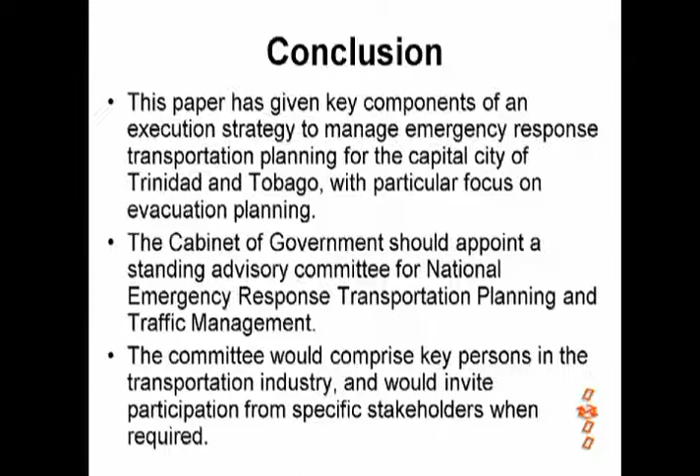The next presenter, for those of us who would have been in the University of the West Indies during the period 1977 to 2005, he would be... excuse me. Yeah, he is certainly no stranger to us.

Engineer Dr. Robin Osborne was born in Dominica. He worked at CARIRI from 1972 to 1979 at the Faculty of Engineering, the University of the West Indies from 1977 to 2005. Sorry, let me start again. From 2008 to 2011, he was an associate professor and vice dean at the Faculty of the Built Environment, UTech, Jamaica, and he now resides in Florida of the United States.

Experienced in both undergraduate and postgraduate university teaching and research, he has been involved in the supervision of 2 successful PhDs at UWI in St. Augustine, one in civil engineering and the other in chemistry. The latter was awarded with high commendation. His major specialization is concrete technology and construction, but he has also worked throughout the Commonwealth Caribbean as a consultant to Caribbean governments and companies on aggregates, standardization, and post-disaster recovery. He has also worked as an instructor in concrete technology and the maintenance of buildings.

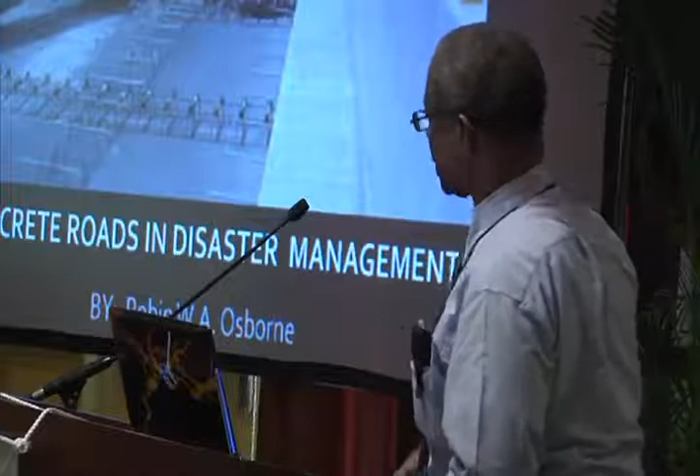Good afternoon, fellow engineers and all necessary dignitaries. Robin Osborne. I'm going to speak a little bit on the subject here, and I'll be as quick as possible getting through the preliminaries because I want to get to my main point of interest. The subject is concrete roads in disaster management, and I want you to half memorize that picture. It is a no-slump concrete being laid. If you look carefully, you will see dowels already placed for joint control, which will be shown later. And some of these pieces of equipment can spread both asphalt and concrete. I'm going to find that the comparison is inescapable.

Let me make sure I have this. Sorry. Which is my, that's, okay, good. Okay, good, thank you. Oh, I can use this one too, that works, good. Sorry, never used this one before.

I would like to acknowledge the support of the marketing department of TCL, Cecil Chin, engineer, for some of his very useful contributions and counsel, Larissa Smith of Carib Cement, General Manager's Office, Arawak Cement.

We cannot escape discussion and comparison between the 2 main forms of pavement systems. And when I look at the literature available, I've looked at American literature and some British literature, the battles that continue to go on are fierce. Engineers are often involved on both sides. There is hype and distortion. And one of the things that is unfortunate is that depending on who pays your salary, you sing a tune to suit. I'm going to try to walk a higher road than that. The issue is complex, and there is need for objectivity and relevance to the Caribbean in any comparisons which we do.

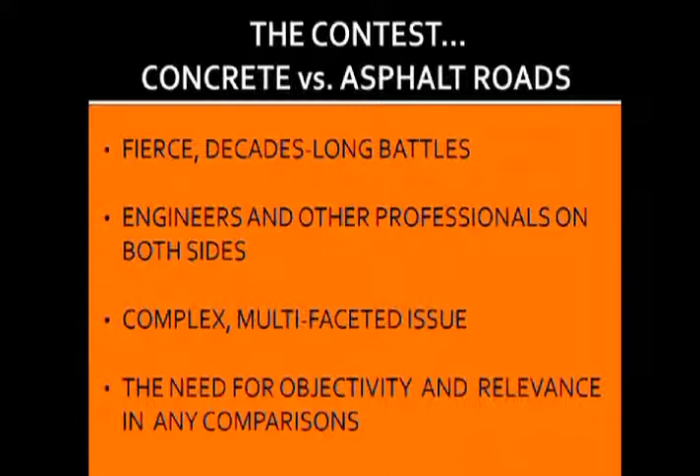It's a very narrow subject. The literature I looked at was not very helpful because it tended to compare asphalt and concrete systems under normal traffic. We are in a disaster context, and so I've tried to keep my focus on that. So in broad structure, I'll be doing some comparisons between the two systems. And my key thing is to look at some projects in the Caribbean, and then a few comments on pitfalls to be avoided, etc.

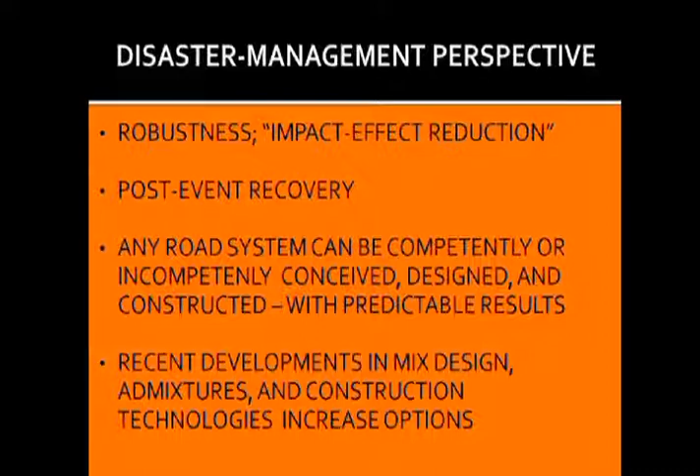My thrust is prevention. That is, if a similar impact can hit two critical systems, and one of them is likely to be operable and usable and serviceable after, then that obviously is a critical consideration in disaster planning and management. Of course, there are issues of cost and so on. So that key thing, what kind of effect can it sustain and remain operable? How does it contribute to post-event recovery? Let me be very honest and say that any system can be competently or incompetently designed, regardless of whether it is made out of concrete or made out of asphalt.

And we need to take note of recent developments in this area in concrete, because they give us considerable flexibility in terms of what we can achieve. In addition to pavements, I quickly want to add these things. I will not spend time, ladies and gentlemen, fellow engineers and friends. These are all well known in our business. And concrete road systems is what I'd like us to think about. We also include all of these appurtenances, some of which can be slip-formed as the road is being made, okay?

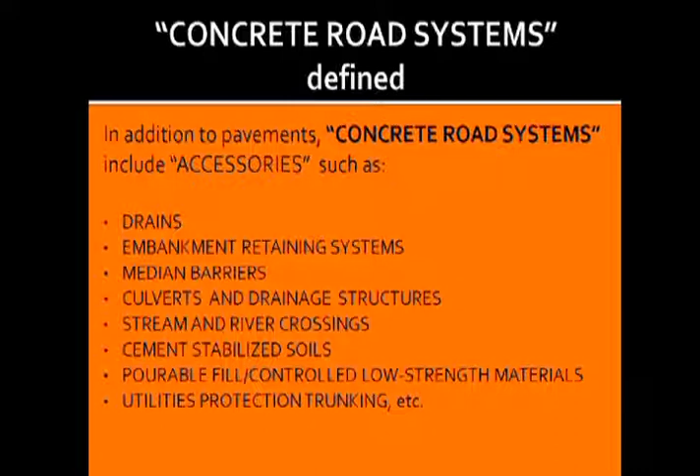We want to look at some of these issues here. Capital cost has often been the reason why people choose asphalt. Let's face it, governments pick because it's cheaper. Because of prices rising in oil and the rapid increases in the prices of petroleum, bitumen or binder... Trinidad is unique in having Trinidad Lake asphalt as well, so that's a special scene.

The issue of longevity needs no discussion. We know that a well-made concrete road, and concrete roads can be badly made as well and give the system a bad name. Concrete roads generally way outlast asphalt roads. Because of advances in paving technology, riding quality and noise generation are equivalent at least. In terms of vehicle fuel economy, concrete roads seem to have the edge, especially in heavy vehicles, where savings of up to 20% have been recorded by reasonably independent and unbiased testing.

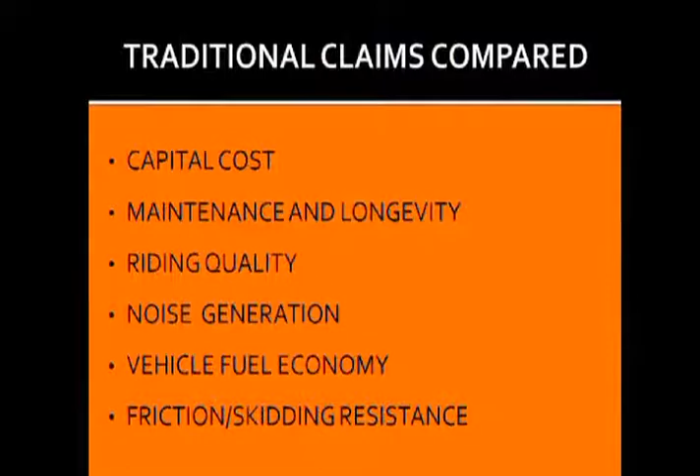In fact, where I live in the US, they've just upgraded part of the I-95, and it's like riding on a billiard table. And I've looked at stuff, I have not quoted it because I haven't been able to check it myself. People say that with most of the modern vehicles having data capture, simply by driving from the asphalt section to the concrete section, people are picking up, like a Hyundai Genesis, going from 34 to 37, 32 to 35 miles per gallon. So even with passenger cars, which had not been anticipated, there are significant and measurable fuel economies.

With the heavy vehicles, and I go into this in detail in the paper, the asphalt surface under a tire pressured to 6 bar and with a footprint of several tons is deformed. Concrete deformation is negligible. So what you have is a viscoelastic deformation that the tire is pushing before it all the time. That transfers into heat, increased engine power requirement to propel the vehicle, etc. So it seems to me from what I've looked at that there are clear advantages in terms of vehicle fuel economy, emissions and all that in that area.

Okay, friction skidding resistance is debatable. A lot depends on how you have finished the road, and so I'll leave that as an open question. Obviously, concrete has the advantage here, advantage here, advantage here, and some advantage alleged in terms of its capacity to bridge weakened sections of the support system. This is a very strong point which I want to come back to, so I want to speed through the rest of them.

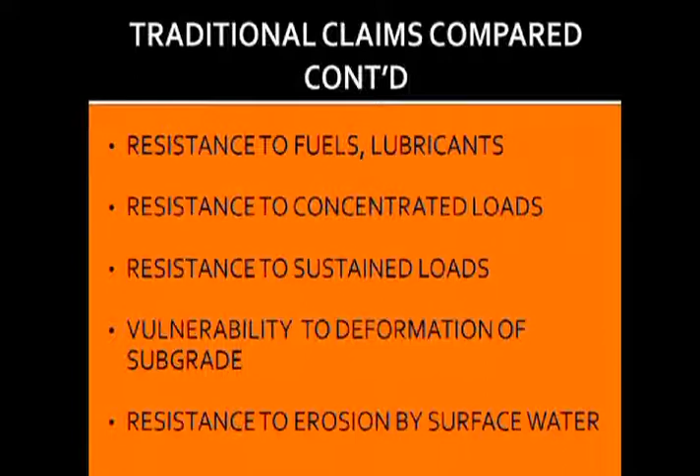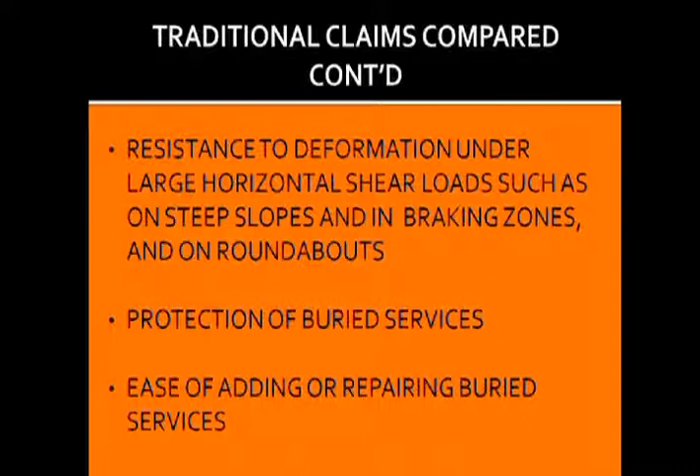This is also an advantage for concrete roads, because if you know the old Pointe-a-Pierre Hill on the Southern Main Road, this is an area where shoving has taken place with significant deterioration of surface and riding quality. This is an area of debate. I'm going very rapidly because we do not have time to go into detail. And again, these are addressed in some detail in the paper.

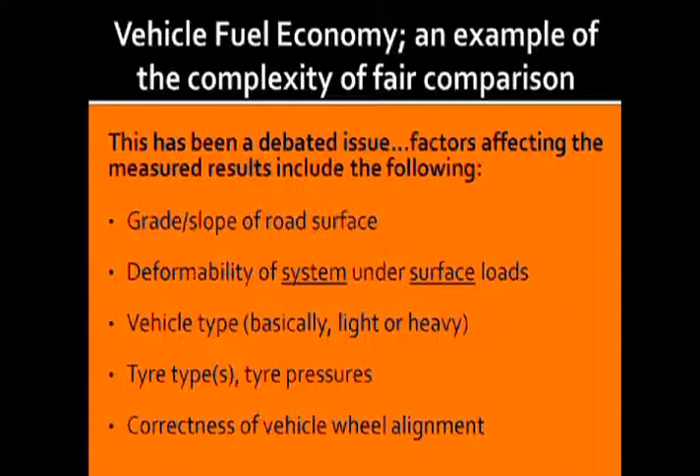This is, I just want to very quickly skip this through because we don't have time to go into it. I have indicated this only to give an example of how complex it is to do a fair comparison between two systems.

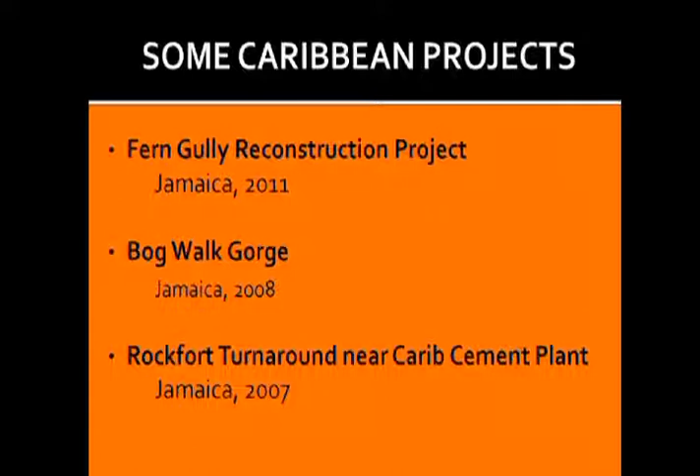I want to go very quickly to some projects because the proof of the pudding is in the eating. And the American and British literature does not discuss the comparisons under disaster conditions. So let's look at a couple Caribbean projects where history is being written as we speak, and the books are being written right now by the behavior of these projects in the Caribbean. So let's go to them. I just want to show you some key ones, okay? This is very instructive to us.

I'd like to spend a wee bit of time, firstly, on this one, which is the Fern Gully, built 2011. Raymond Charles, engineer Charles, reviewed the design in 2008. Previous to that, there were at least 3 destructions and reconstructions in the previous 19-year period. 4,000 vehicles per day approx. Truck passage is prohibited. We see buried services at risk.

And what has happened repeatedly, this is to the south proceeding towards Ocho Rios. The road failed several times and had to be repaired with all the attendant capital and socioeconomic costs. Since the concrete replacement, there have been some severe testings from erosion and storms, but there's been no problem. The road is still breathing easy, okay?

I could go on, but I'm truncating. I want to cooperate with everything, including lunch, so you can ask me questions after.

This is the Bog Walk Gorge adjacent to Rio Cobre. You can get from the size of the man an idea of a major main of the National Water Commission of Jamaica feeding Kingston. Because the Cobre often overflows, parts of this road are often closed, but more so, the road becomes damaged. It was repaired in concrete. I think the figure is 2008. It's in the previous slide. And since then, there has been no trouble at all.

To make it interesting, the National Water Commission got a contract for replacing parts of this. So after the concrete was placed, they had to cut back into it to change this. This is a very familiar story. It was apparently properly done, and since the replacement and repair of the concrete pavement, again, no need for intervention. I think the facts speak for themselves.

I want to speak about a little project near Carib Cement in Jamaica called the Rockfort Turnaround. It's a regular roundabout. It is traversed largely by heavily laden cement trucks. There was a collaboration between the National Works Agency and Carib Cement, and they started seeing premature surface degeneration, that is, coarse aggregate being exposed. I was asked to look at it by the general manager, Tony Haynes of Tobago, and I checked all the paperwork, and all the paperwork was perfect, all the specs.

So I had to go on my knees, almost with a magnifying glass and a high-powered flashlight to look, and then I realized what had been done. In the same way a bad man can make a potentially good wife into a bad wife by mistreatment, I suppose the reverse is true, but I don't know. Concrete is critically dependent on what you do with the fresh concrete. I've taught this for years across the Caribbean, from Guyana to Belize.

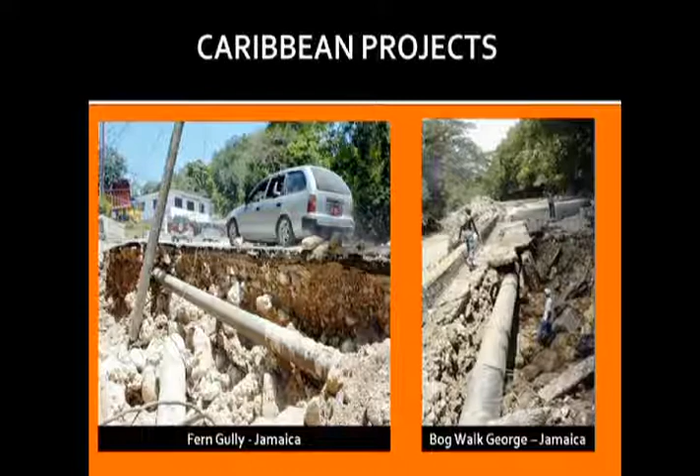And what happened? They overworked the concrete. They caused segregation, fine stuff of high water to cement ratio coming to the top, low wear resistance, low compressive strength. In spite of this compromise of the potential quality of the pavement, and in spite of its extremely severe regular testing under heavily laden trucks at tight radii, the structure remains with no need of intervention, in spite of the fact that it was not properly done. Few other quick examples.

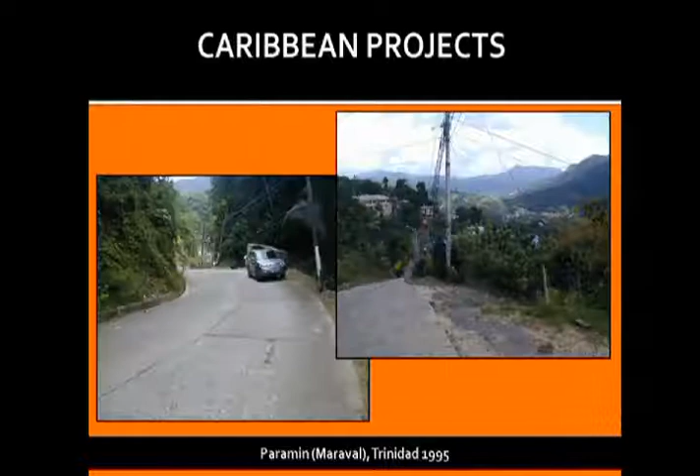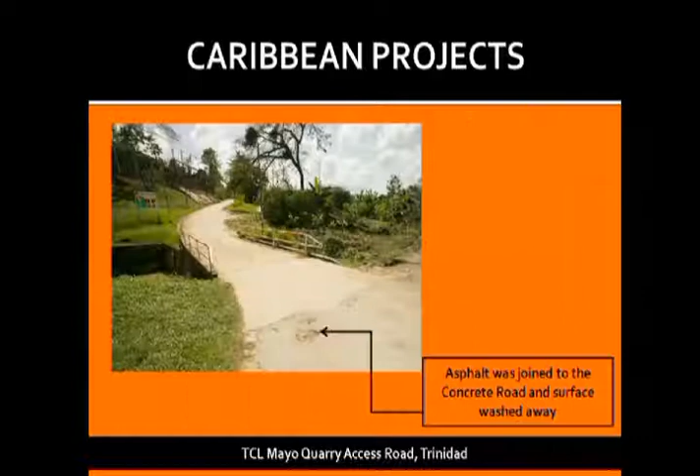Paramin again, we go through quickly. Filling station in NP. This is new, so it's too soon to make judgments, but concrete was chosen because of the very high wheel loads that were anticipated there. Another: Mayo Quarry, again severely tested, part of the company's own infrastructure, which has stood up well. Another picture of Mayo.

I want to talk quickly of one or two other things. The recent, and I only have about 3.5 minutes according to me, the recent December 24th deluge in the islands. I've spoken with one of the engineers of the department to which I was a consultant up until recently, and he says something which I am quoting largely by memory from my paper. He said, Robin, we did the homework and we've seen the results. 125 to 150 millimeter concrete pavement, especially in hilly areas subjected to intense rain, which is a critical challenge.

It blows my mind, and I haven't seen the actual information, but CTO Kendall Johnson, former UWI grad, assures me that there are parts of Dominica, where I was born, where the rainfall is over 10 meters per annum. Now, try to grapple with that in your mind. He said there's evidence, clear evidence of 7 meters on the rain gauges.

And in the Morne Trois Pitons area, which is a UN heritage site, there are 3 peaks over 4,000 feet high, and the extremely intense weather events there mean that even when a lot of other places are dry, and even in the dry season, rain is coming down bucket a drop. There's one area where within 1 mile there are 16 natural drainage crossings. So that's an idea of how it is in some of the islands.

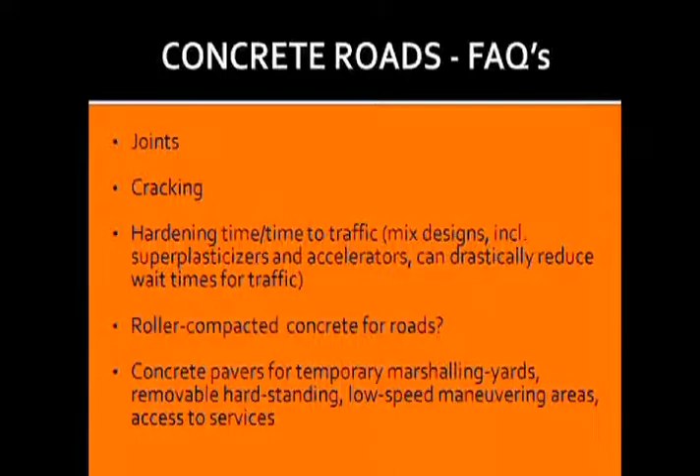I think what I'm basically saying, and I summarize, is that there are a number of potential advantages of concrete road pavement systems which we have not looked at. And the present developments in mix design, accelerators, superplasticizers, and new pavers mean that we can do a whole lot of stuff much better than we have been able to do it in the past. And even then, if you look at the things you have in your hand, one of them is a road that's 100 years old, cracked up like an old person's face, Belknap Street in San Antonio, Texas, still going strong, and you can see some of the service life issues.

So definitely in terms of service life and maintenance and resistance to erosive rain events, we don't need a hurricane. We only need a lot of rain, and we have crises, whether it's the flooding of Port of Spain, whether it's road erosion in Paramin, in St. Lucia, in St. Vincent, in Dominica. What we are saying, and I'm not saying this on behalf of the company, I've done a fairly thorough review of the literature available. There are a number of advantages that are potential, need to be explored, but this will require collaboration, investment, and initiatives between all the stakeholders, TCL, designers, contractors, government.